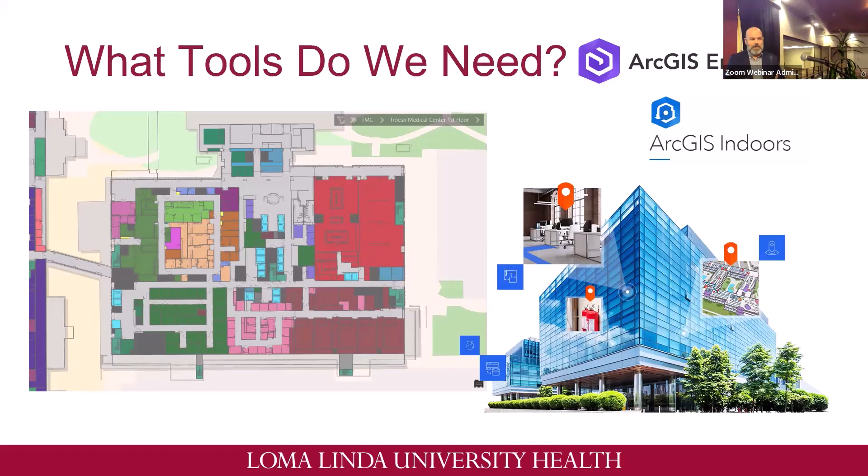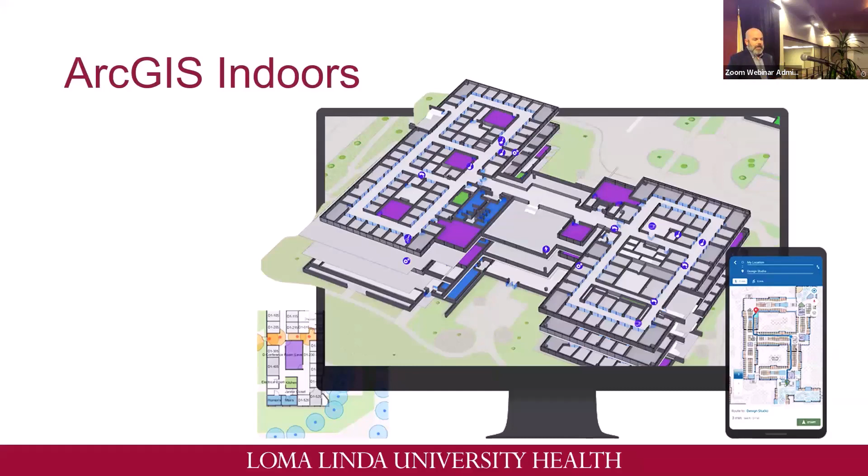So I want to give a quick background on ArcGIS Indoors for people not familiar. This is a product from Esri that's been around for a few years now. It works in both their ArcGIS Online and ArcGIS Enterprise systems. It can be deployed rapidly. There's many different facets to it, most of which we'll actually talk about today, including wayfinding, the asset management, space management pieces, and things like that.

One of the goals with patient wayfinding is to make it easier for people to know where they can go. We developed some apps to help the customer with ease of mind, so patients have less anxiety about coming into the hospital, coming to their appointments and everything like that. We actually developed a parking app that will tell you, if you put in the building you're looking for, what parking lot you can park at, depending on where in the building that is or what you may have access to.

With Indoors, we can take that even further and bring them into the building and then take them to the correct elevator that they need to go to, up to their appointment. And with that, we'll have a little demo.

Okay, so this is one of our patient applications, an app that can be deployed and viewed through a browser, but you could also use it on a mobile device. This is built in JavaScript, so it's very flexible for different applications. This can actually even be deployed on kiosks throughout a hospital, an airport, or anything like that, to help people navigate wherever they need to go or find more information about the buildings they're in.

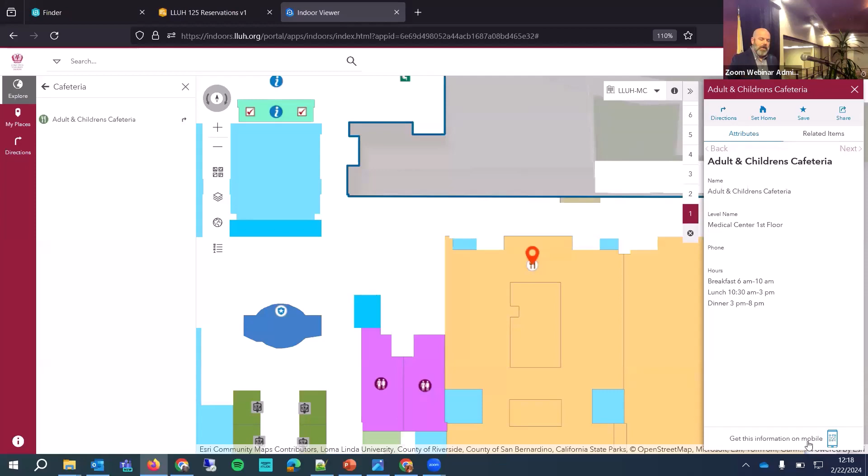You can share this out. And because it's built on mobile, think of it like a kiosk — you could put your smartphone up right here and it'll pull up the map. And so you could start walking wherever you need to go just directly from the app.

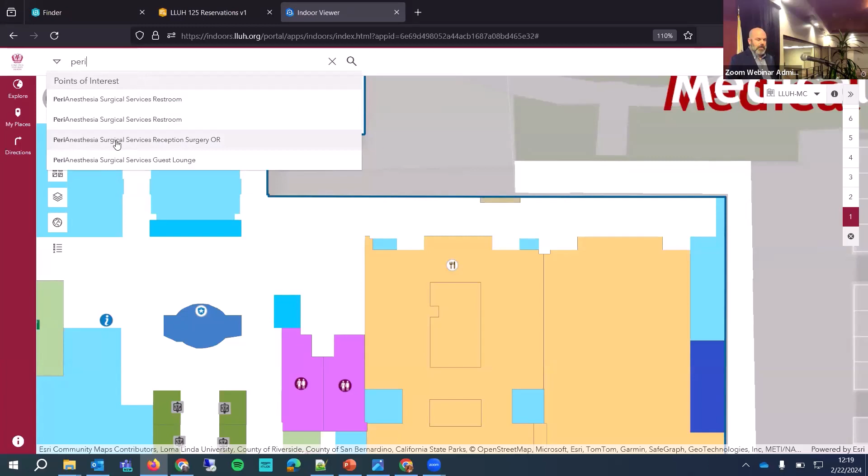But let's say, for instance, that we do have an appointment — let's say I have a peri-anesthesia surgical service that I need to go to. So I'm going to go to their guest lounge. Because we're using Indoors, it switched automatically to the 3rd floor, so we know we're there. This is where our appointment is, and we want to get directions.

There's a couple of ways you can configure this. Because we're not there physically, I'm going to use the map, but you could essentially turn on your location on your device and get a blue dot technology to navigate wherever you need to go, depending on which elevator and everything. But for this reference, let's just say we're in the parking lot on P3, level 1, and it's automatically going to start building a route for us.

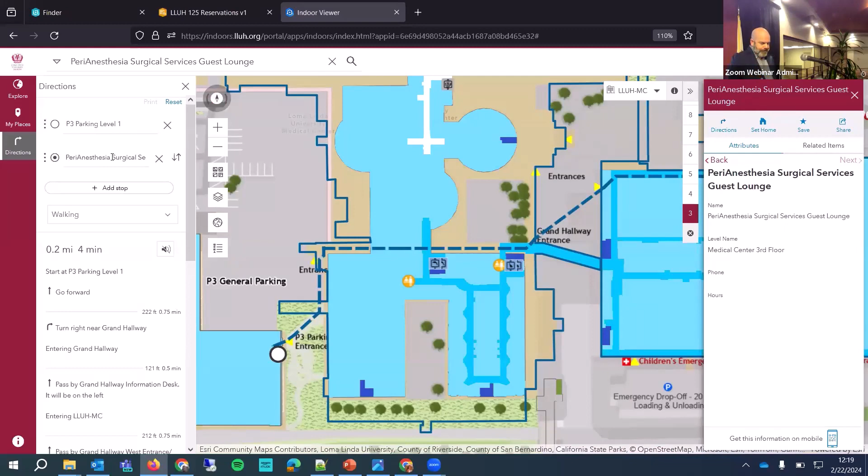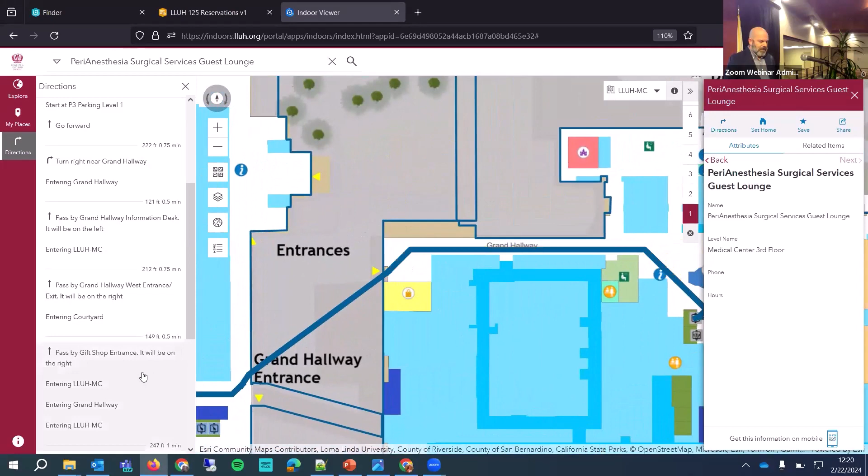So for instance, if we start at the parking level, it's going to have us move forward through the parking deck, then tell us to turn into this grand hallway. We're going to pass by the information desk, and then go out through the exit on that side of the building, entering the courtyard. We'll go through the next building and pass by the gift shop on the right.

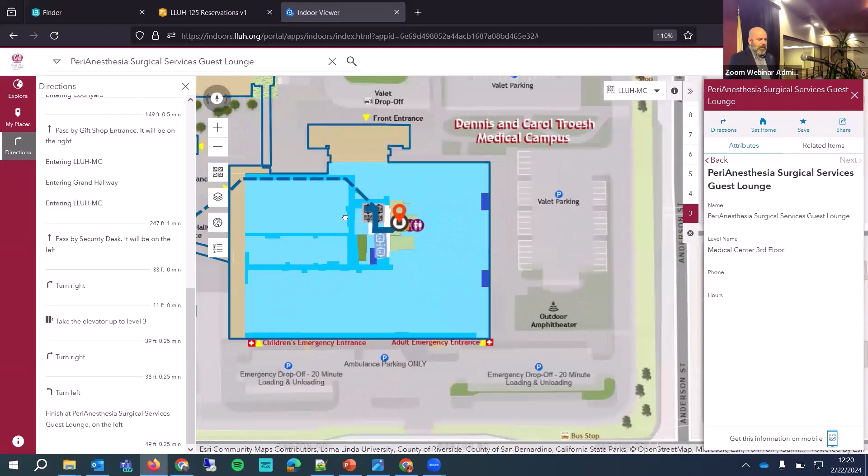And then we'll pass by our security desk so you can get a badge to come in, then turn right, go to the elevator, and it tells you to go up to the 3rd floor. Once you're there, it's basically just turning around and you're right at your appointment. So very easy to set up. And of course this is just one building — you can have multiple buildings throughout your campus, and we actually went through 2 buildings to get there. But you can see how this could be confusing to patients coming in, and something like this makes it really simple for them. It also frees up your staff from having to walk people around to different appointments and helps more people.

So I'm going to do this again. Duplicate. All right. Okay.

Next thing I want to talk about is asset tracking. One of the most important jobs of any business is knowing where your assets are. In the case of hospitals, there's machines and equipment that costs hundreds of thousands of dollars. It can be common for nurses or other staff to be territorial with the equipment they use, and they want to make sure it's there when they need it.

This also applies to our dispatch team who oversees wheelchairs, because as you know, people need wheelchairs when they get out of their car or when they get dropped off at the valet. They need to have these things on hand.

So at Loma Linda, we've developed a system that tracks assets by the second and shows the latest known location of items. We call it Finder, and I'll do a quick demo for you.

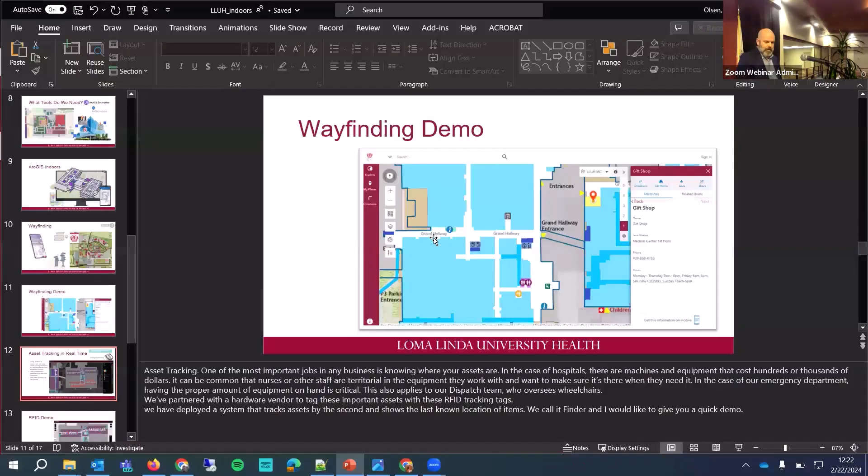Up here in the upper corner, you see one of the little tracker devices. We use RFID technology throughout the building to be able to track these different things in real time.

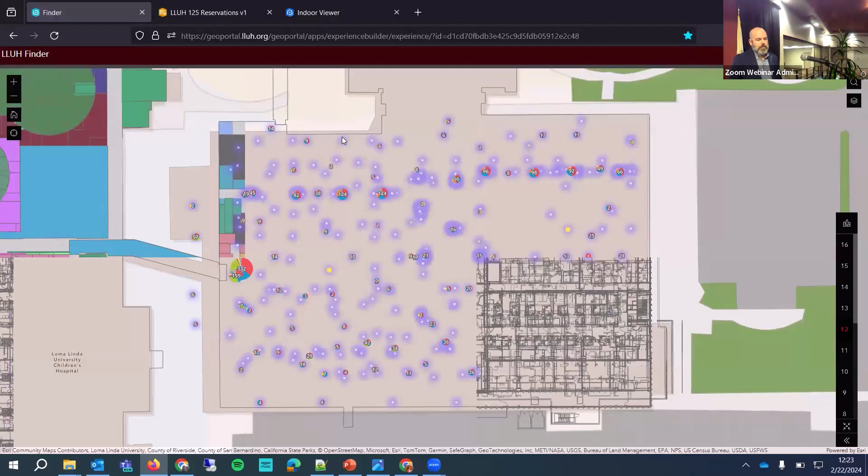So this is our Finder app. The people that are going to use this, in the case of a hospital system for us, might be the charge nurses that are in charge of a floor, and they're responsible for their own equipment. So this nursing staff has a list of equipment that their department is responsible for, and they need to know where things are at.

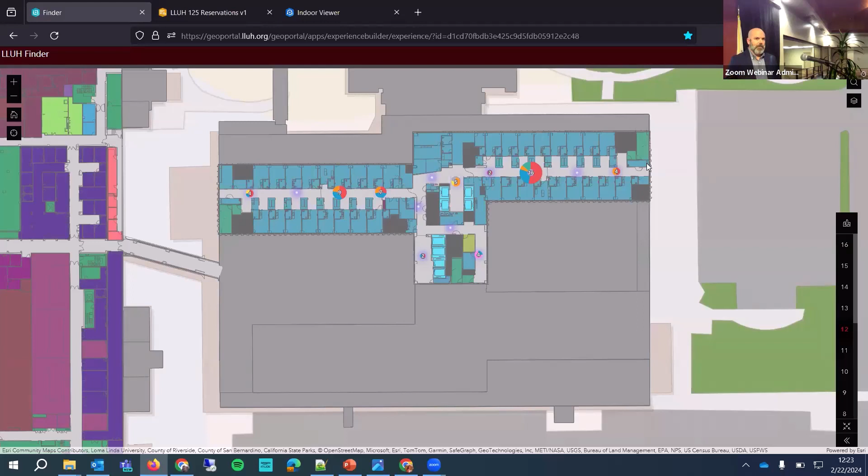In the case of our dispatch team, like I said before, they are looking for wheelchairs, things that can be rapidly deployed. So you can see we've got indoors turned on here. I'll go down to our first floor, and I've kind of color coded our departments, but you could facilitate the map any way you like.

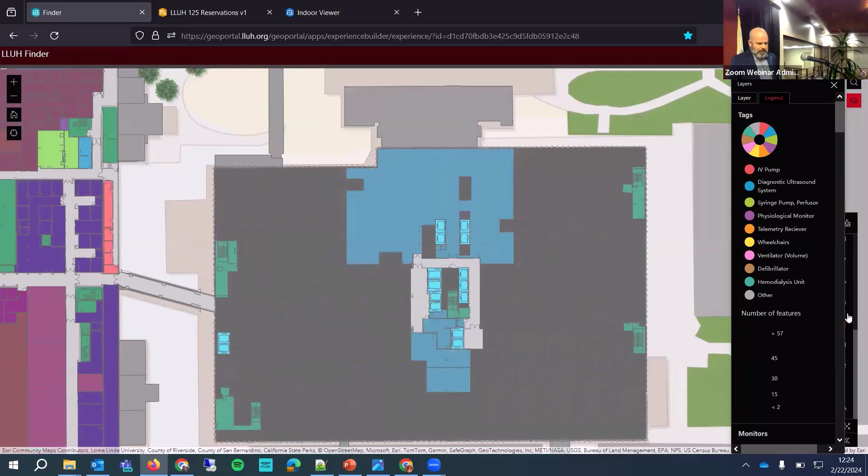What we're looking at here, and it might be a little hard to tell on this one, but we'll go to a different floor here real quick. So you can see these little circles throughout each of the floors, and these represent monitors that are on the ceilings in the hallway. When we start to look at these assets, there's a little pie chart that gives you the actual number of assets close to this beacon. These have about a 10 to 15 foot range.

You could quickly just click on here to see what was near here and get some information from the pop-up. We can see that there's 6 IV pumps, 9 ultrasound systems, 6 telemetry receivers, and 1 that falls in the category of other. If you want to drill down even further, you can do that by clicking Browse Features.

Here are the individual items themselves. For instance, this one is one of our B. Braun IV pumps. You can see the equipment details on it, and you can see where it's near. So this is near the 6th floor, near this room, and the last time the location was updated was about 10 days ago at 9:59 p.m.

As you can see, some things move around more than others. For instance, this IV pump has not moved since August. So as I said, each department is responsible for their items. This could be something sitting in a supply closet somewhere, but the last known location was in this area.

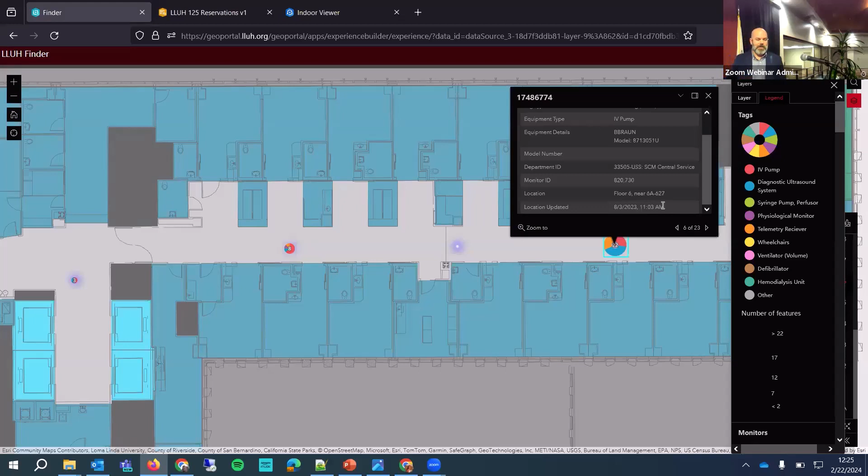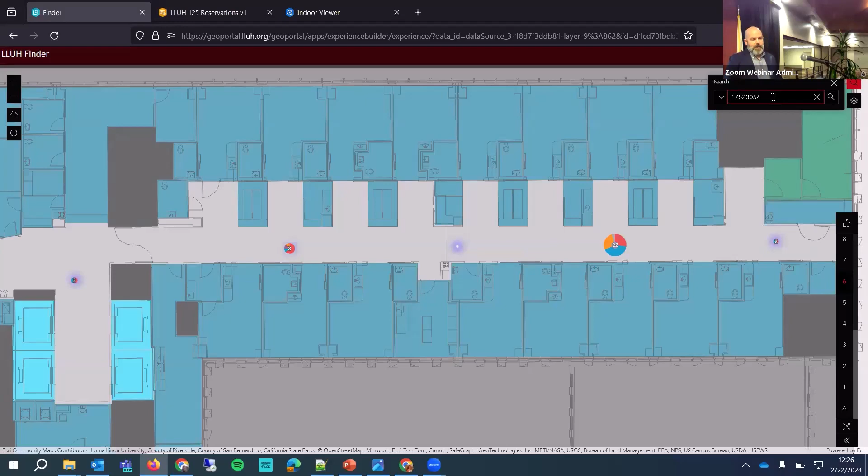The other way to search for items, and probably the main way people look for things, is if they have a list of items they're responsible for, like the charge nurse, or the dispatch team knows the wheelchairs. So for instance, if we have a sheet with all the numbers on it, we could look up each tag ID.

This is going to zoom right into which floor it's at. So this is one of our wheelchairs that we're looking for, and it looks like it's up on the 10th floor. That was last updated probably about a week ago.

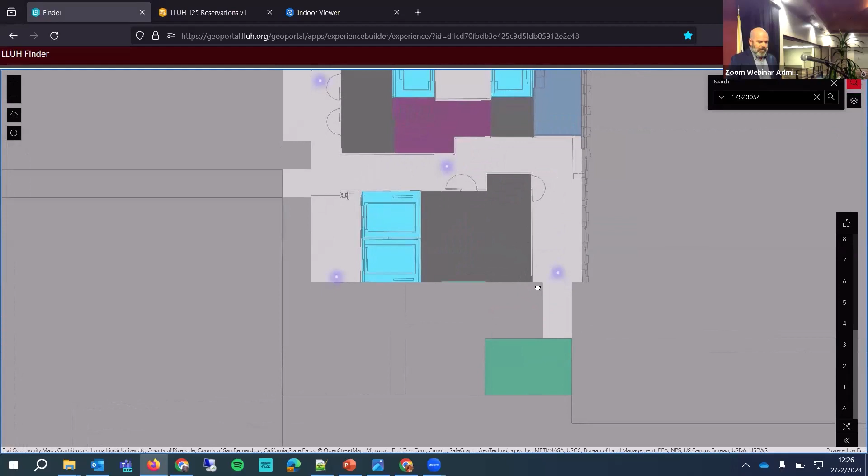So if you look at where it is, for our map would load here. This is actually near one of our closets, so this could be up near one of the elevators, or maybe just kind of sitting off by itself. So if we were on a dispatch team, we'd want to go up and get that and bring it back down to maybe our emergency department or something like that.

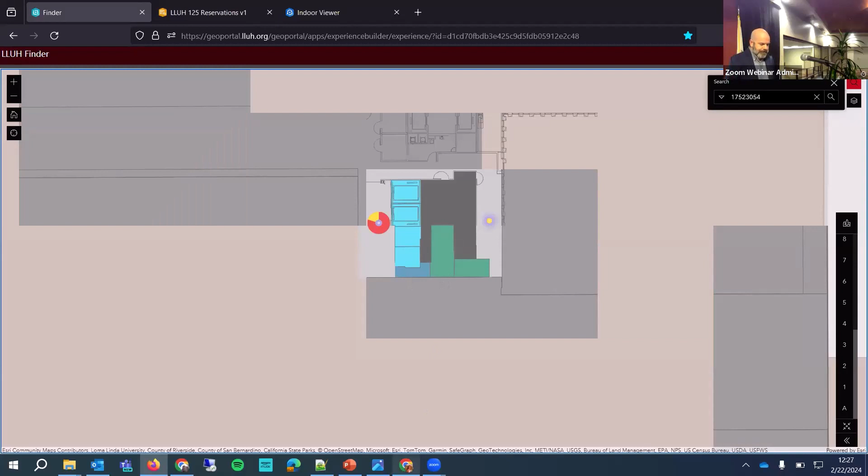Again, I'll grab another one. For instance, this is one of our infusion pumps. If I'm in charge of that and I need to know where it is, I'm going to type it into our finder, and I can see that it's down here on our 2nd floor, near our emergency department. So we know exactly where things are.

One of the other cool things that's come out of this, which we didn't really anticipate, is that we launched this back in June of last year, and right now it's just in one building. We have about 400 of these monitor stations throughout the hospital in this building, which is a 16-story building. But we're looking at expanding into other buildings and other areas, and including more assets to tag. Currently we have about 4,000, and we're looking to expand beyond that.

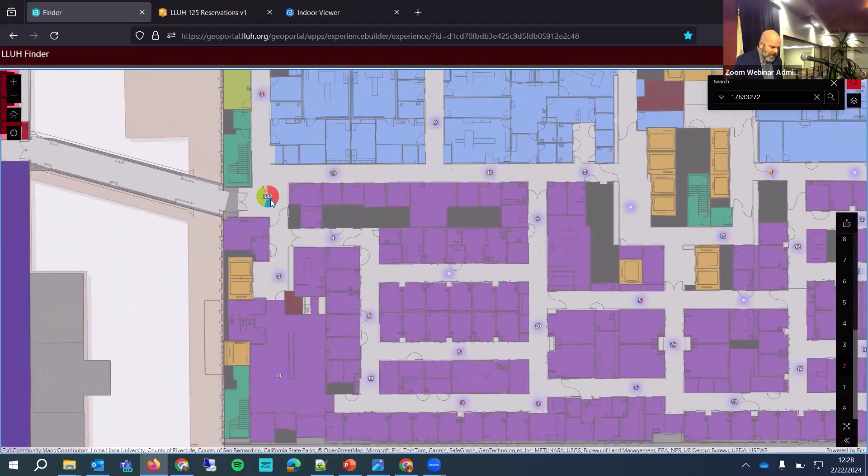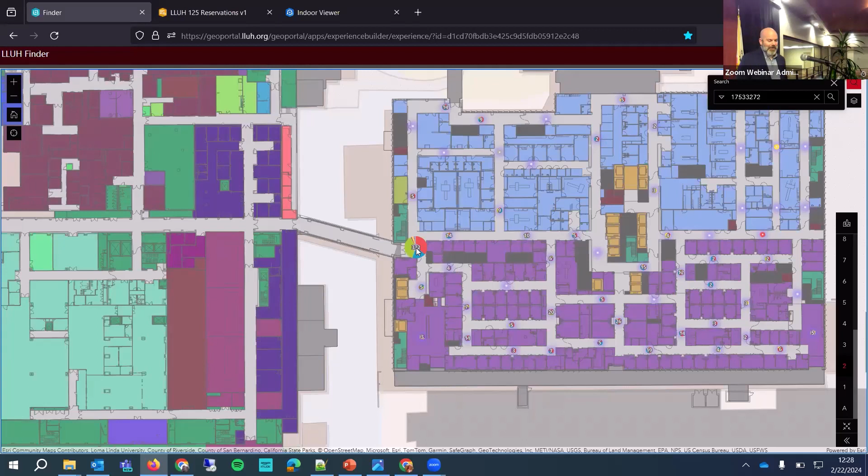If you notice, one of our biggest circles right here, of 332 items, is right near a doorway to a bridge that goes across to the other hospital. So the last known location was there before it went over to the other hospital. So we might have a case of things going missing, and we kind of know where they are, where they left, kind of thing.

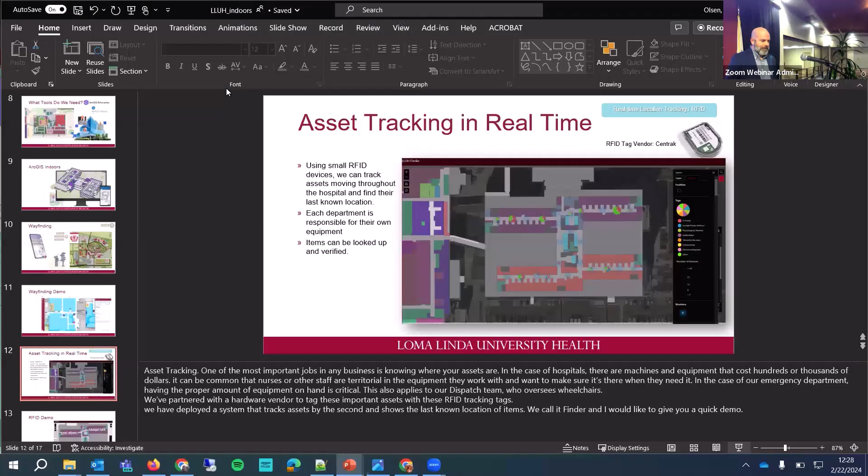And back here. All right, that was my demo.

So the last thing I want to talk about is some of the solutions that indoors can present. When 2020 hit with COVID and everybody started working remote, we were in the same way. Our IT department is about 400 people, and everyone started working remote. But we were very successful in this, and because of that, well, maybe other reasons too, the company took away our space. We had a nice floor in our building, everybody had cubicles, everybody was sharing information. But then COVID happened and they decided they needed more clinic space, so our space got taken away.

But our managers gave us the option. They said you can stay remote or you can go hybrid. Almost 95% of our staff wanted to stay remote, but there's a few that like going to the hospital or into the office, they like the idea of going into an office. And of course we have executives that need to go into the office every day, so they needed a space.

One of the admins for our department was, without me knowing, shopping around for kind of a hoteling space, a way to reserve desks and stuff like that. She kind of asked us in location services, well, you guys do GIS, is that kind of like something you could do? The reservation system had just come out from indoors, and we said yes, of course. She asked, well, how much is it going to cost? Because she had had a quote from this third-party company of $1 million.

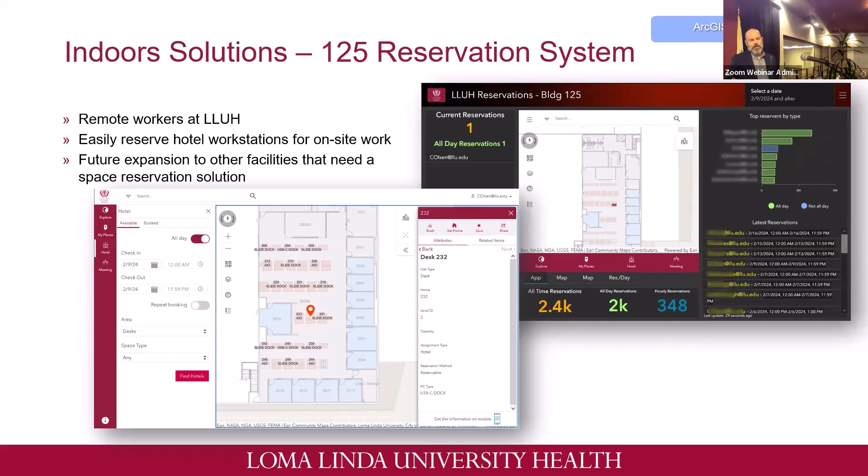So let me give you a little demo of that as well. It's going to make me sign in.

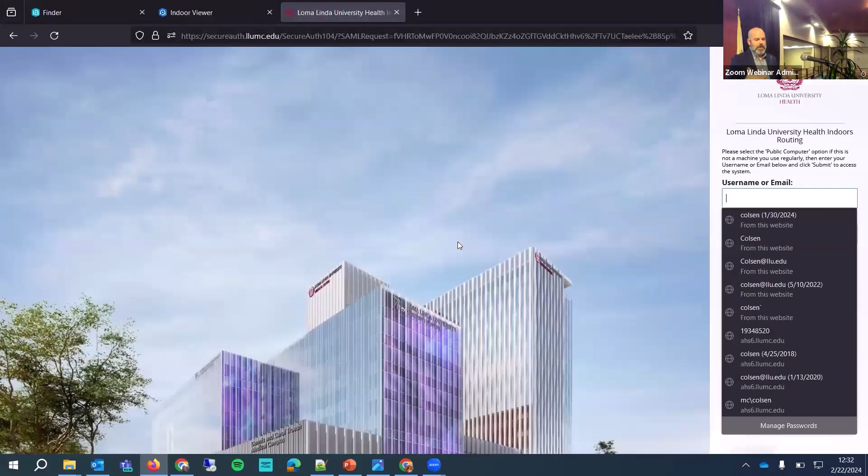This may answer some questions that people have. Of course, with security—we work in a hospital, we have HIPAA data—everything within enterprise can be configured for security reasons. We actually use a lot of that; within enterprise you can set groups, do different permissions within those groups, as well as share it out to individual teams or even the department without things going public.

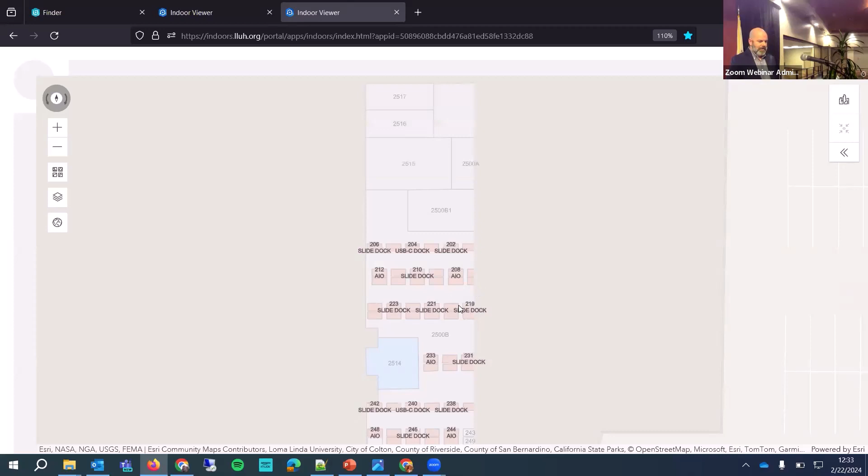We actually have, in this building, different docking stations depending on whether you want Macs or PCs or different types of computers to set up. We're waiting a little bit for the maps to come in. There we go—so all of the tan desks are available.

Looks like the one in red is the only one that has somebody there right now. Our executive offices, while they're technically part of the indoor system, the blue ones are not reservable, because that's where a lot of the admins or executives will sit.

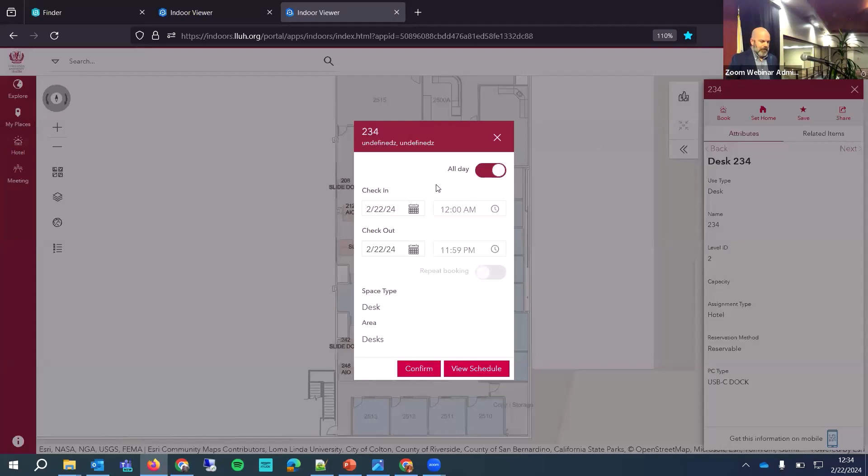Let's say, for instance, that I'm coming into this building and I wanted to pick this desk here. Of course I can get information on it, but I can also book it right here. When I click book, it's going to bring up a schedule, and I can see when this desk is available—I have the hourly schedule. So if I want to just book it for an hour or 2 hours, I can do that, or I can create an all-day booking that reserves it for whenever I want to come in. I just click book, and it asks me for the confirmation.

And there you go, it's all booked. I can add this to my calendar so it can be sent to Outlook or Gmail, or whatever you want it to do.

Now you see that it turns red because I booked it. I can go over and look at my bookings. So if I have this desk reserved today, I could have another desk reserved tomorrow. All of these are tracked because I've signed in, you see up on the right-hand side with my account.

ArcGIS Indoors also allows managers to see this as well. So an administrator could go in and see everyone who's done bookings, so they can plan out who's going to be in the building that day and where those desks are going to be.

Once I'm there, I can click check-in, so my administrator knows that I'm there. And when I'm done, I can check out.

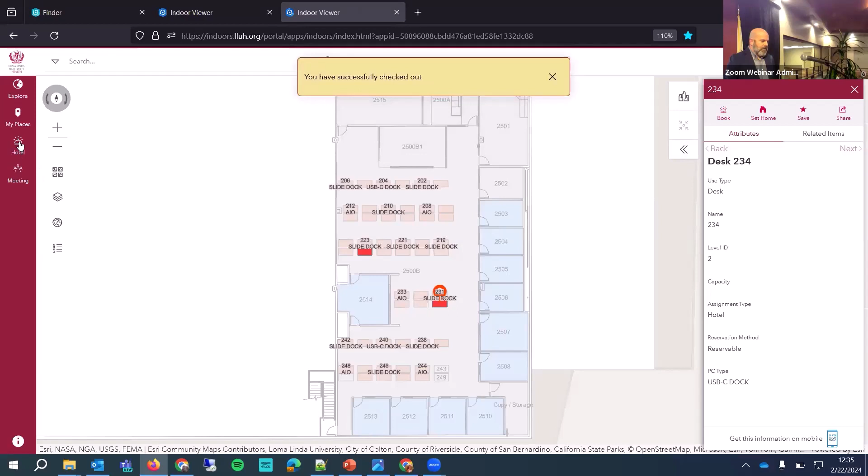If I wanted a different space or a bigger area and wanted to know what hotels were available, I could run a search here, or search on a different day and click find hotels, and it would break out a list of all the hotels or desks available for me to book. As an administrator, I could go in and see all the ones that are already booked.

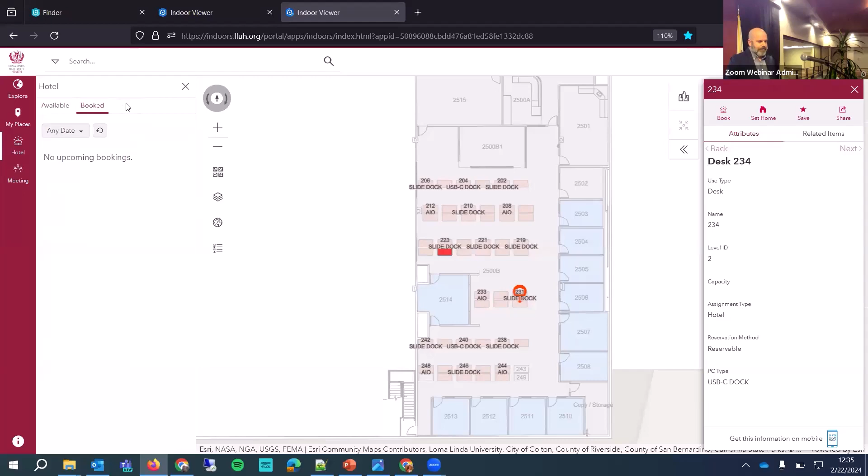All right. So there's the demo for that.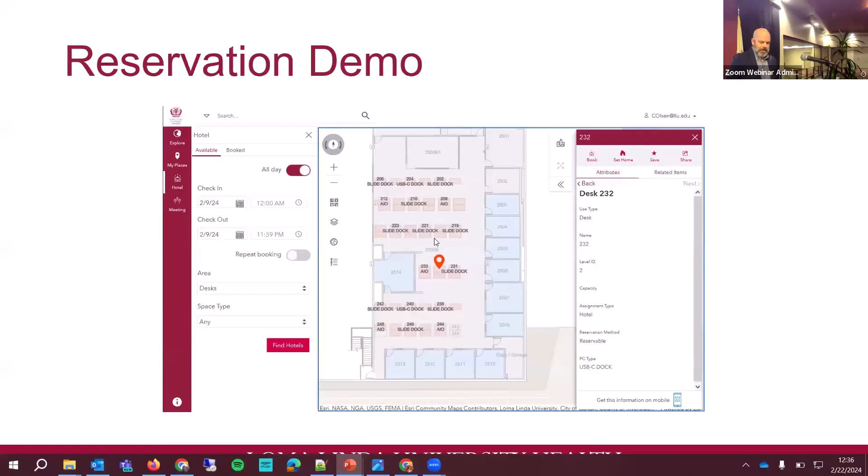In conclusion, at Loma Linda University Health, we see the transformative power of what GIS Enterprise and ArcGIS Indoors can do for our systems. We've had years of implementation, and it's brought tremendous value to the organization, saving millions of dollars per year, as well as boosting the patient and employee experiences. We'll continue to push these systems further in healthcare and utilize GIS as an integral part of our daily activities.